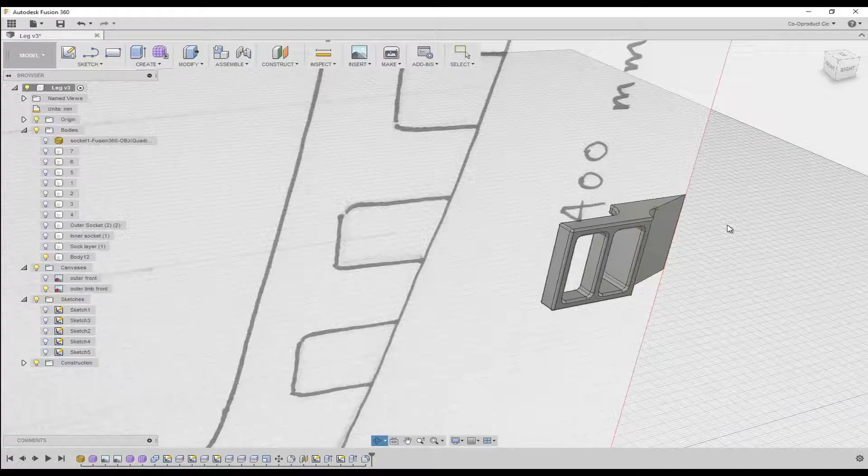To begin, in the browser, let's turn on the visibility for our outer socket body. Then in the View cube, click for a right-hand view, and select Zoom to fit. We need 12 buckles in total, so what we're going to do is copy and paste this buckle to make 6.

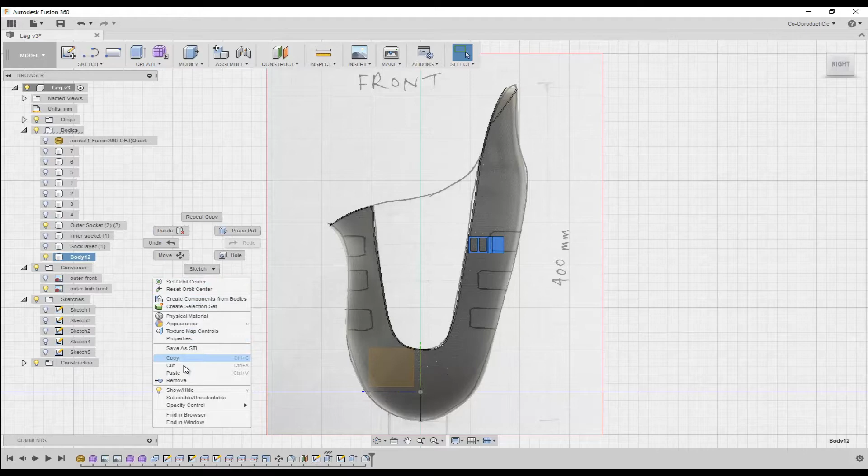Then we'll mirror the 6 on the other side to create 12 in total. In the browser, right-click on the buckle body—in my case, this is body 12. Select Copy, then right-click on the canvas and select Paste. This creates a new body in the browser, and we can use the manipulation arrows to move the new buckle copy. At this stage, we're not really positioning the buckles precisely—we're just making copies and positioning them roughly using our attached canvas profile sketch as reference.

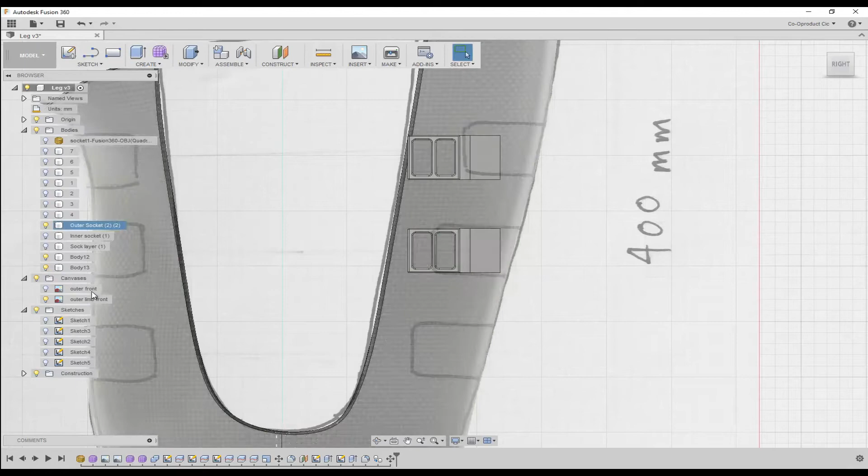When you're happy with the position of the buckle, click OK to close the dialog window. Then complete the workflow again by right-clicking on the last body in the browser, selecting Copy, then right-clicking on the canvas and selecting Paste. Do this for the next 2 buckles until you get to the stage where you have 3 buckles like this.

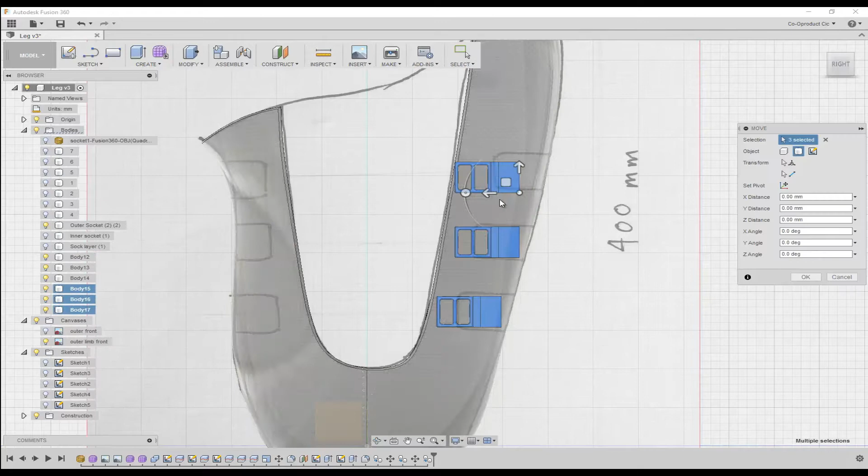Now select all 3 buckle bodies in the browser, right-click and copy, then right-click on the canvas and paste. Use the manipulation tools to move the buckles to the left-hand side and to rotate them 180 degrees. Position them roughly according to the reference sketch, then click OK to close the dialog window.

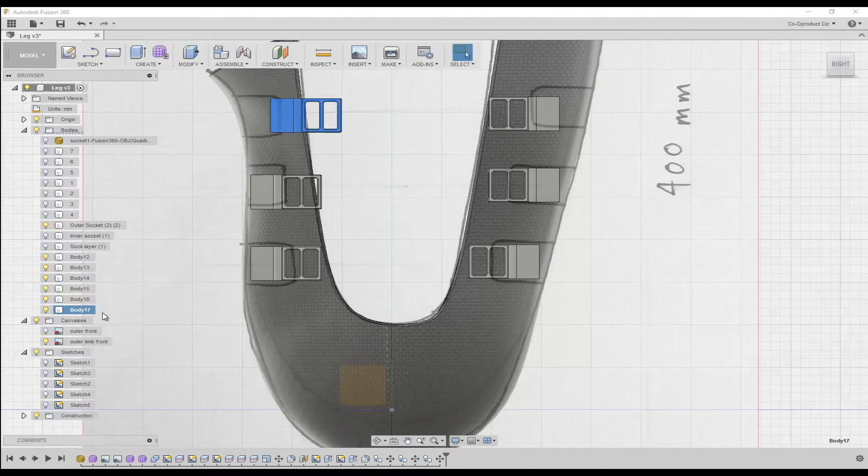The individual buckles can be moved independently simply by right-clicking on the buckle body in the browser and then selecting Move. Now because our prosthetic socket concept is designed to be 3D printed in carbon reinforced plastic, we don't need to worry about fixings for the buckles. The buckles and the outer socket will all be 3D printed in one piece.

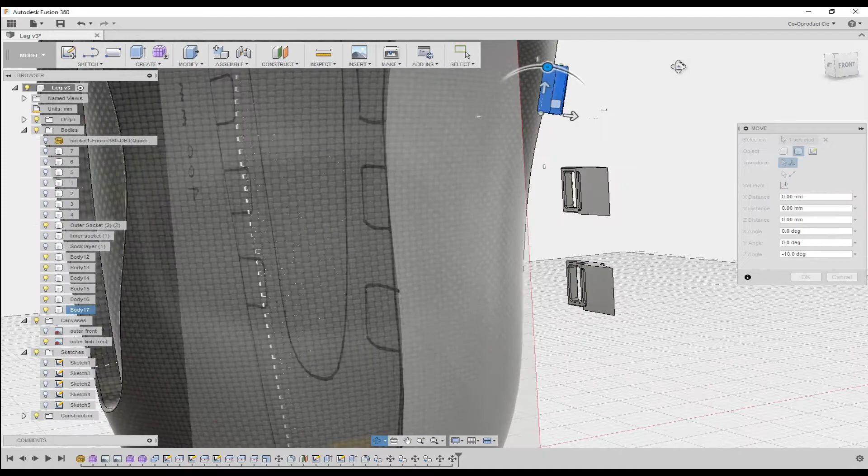As such, we need to use the View cube and the navigation tools in Fusion to ensure that we position our buckles so that they actually join with the outer socket design, therefore overlapping the bodies in Fusion. We can use the reference sketch as a guide, but don't be afraid to deviate from it, and ensure that you move around as much as you need in order to accurately merge the buckles with the outer socket.

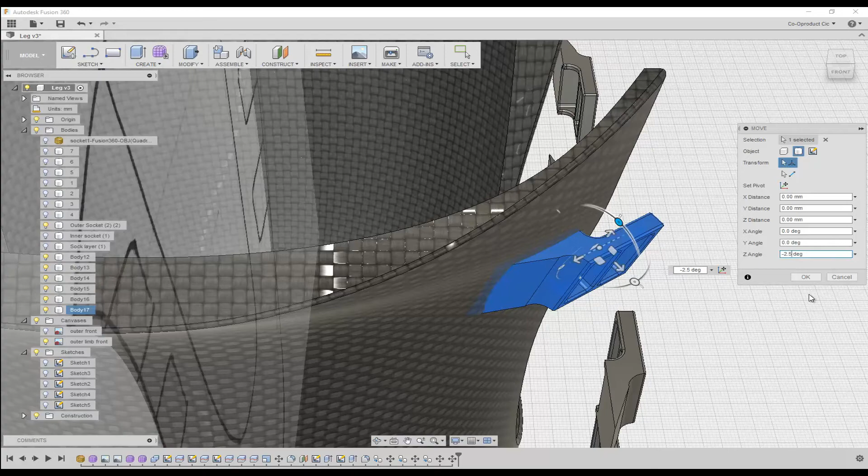Take your time to merge the buckle into the outer socket, and when you've finished, click OK to close the dialog window. Repeat this process for all other 11 buckles until you arrive at something that looks like this.

When all 12 buckles are correctly positioned and merged with the outer socket, then you're ready to apply the physical material. In the browser, toggle the visibility for the attached canvas off and toggle on the visibility for the inner socket body and the sock layer body.

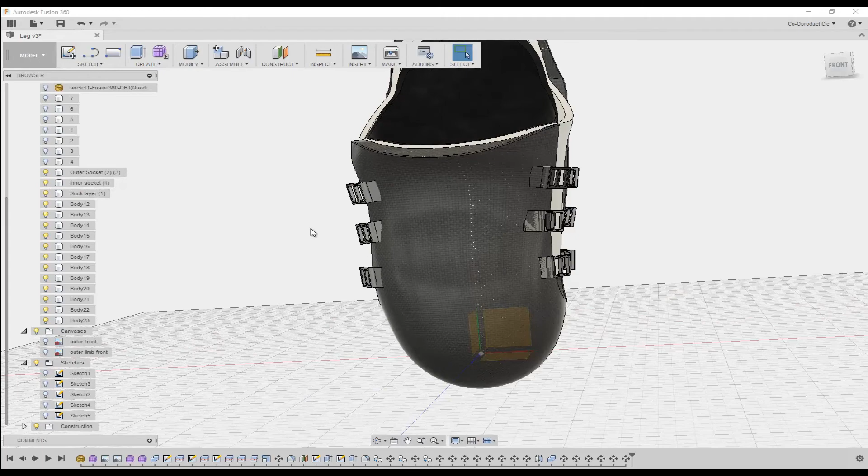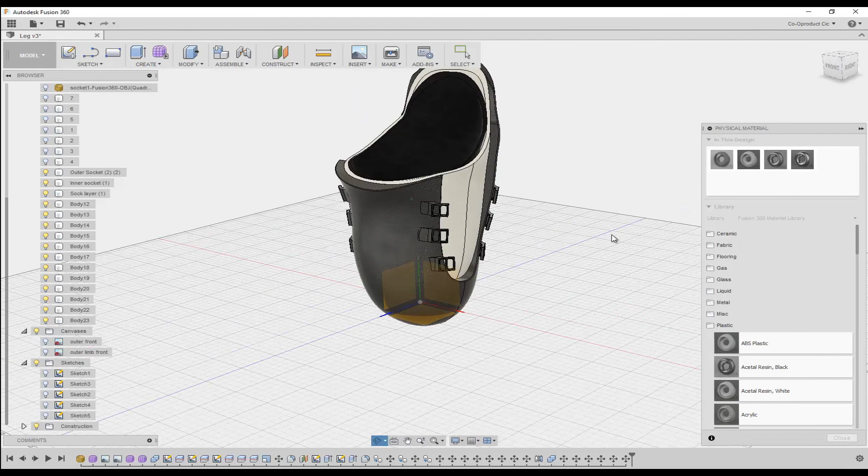Right-click on the canvas and select Physical Material, then drag and drop carbon reinforced plastic onto all 12 buckles to apply the material. Fusion remembers that we've already assigned this material to our design, so we can simply grab it from the material selection at the very top of the dialog in this design. When we've assigned the physical material to all 12 buckles, we can click to close the dialog window.

And that completes this lesson.